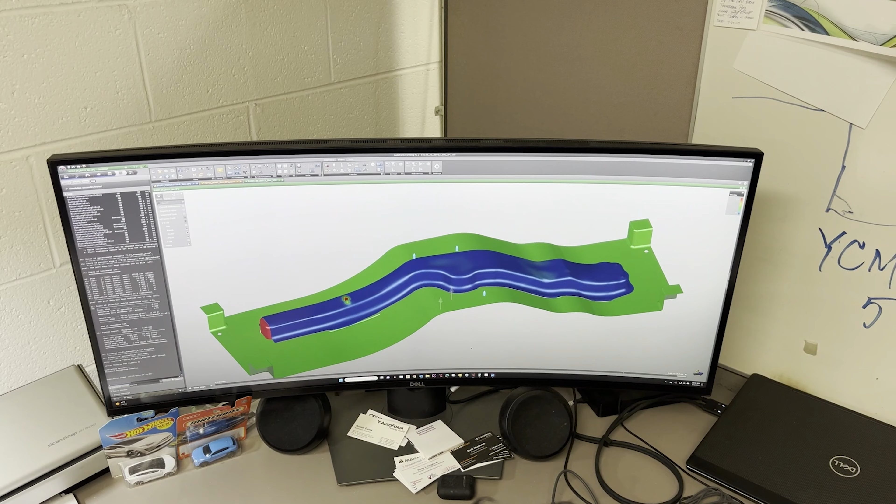Software is pretty amazing. So we have really good tool designers, and they get it right like 90% of the time. But with this software, it's 100% of the time. So what this is able to do, we put in the material data card for the stamping, whether that happens to be a dual phase like a DP980 or just like a traditional 340 megapascal part.

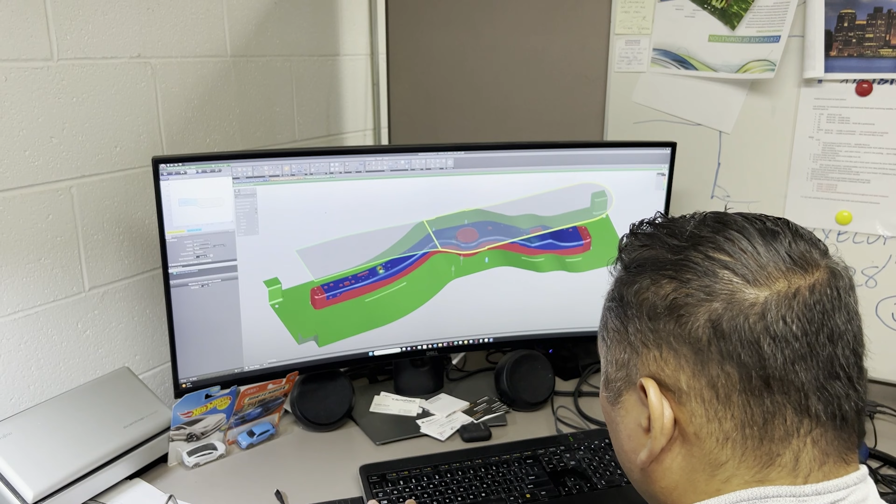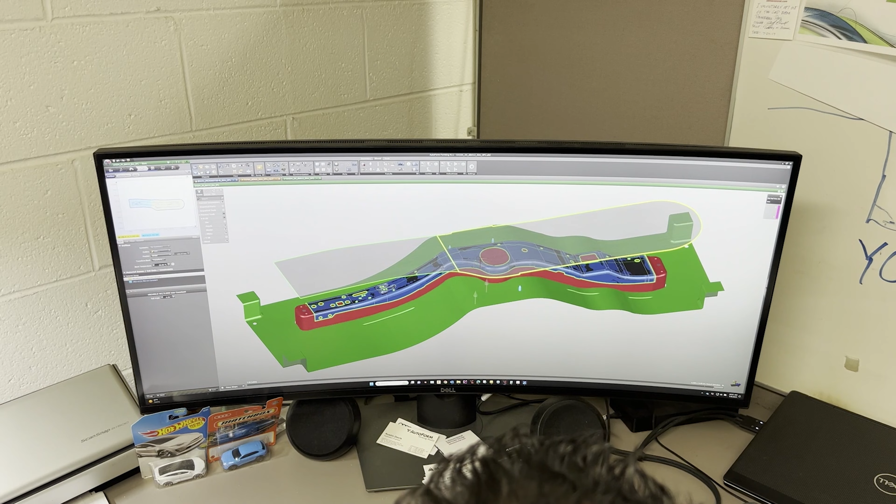We put in those parameters, we come up with the tooling strategy, and then this sims out if the part has too much thinning, too much compression, if the part is going to have a great deal of spring back, and then we can compensate and change our tooling strategy accordingly to make sure that we're getting a good part with as few hits as possible. So instead of maybe like a 3-hit part, we can manufacture the part in 2 hits but add some compensation into our tooling.

And again, these parts have only in the past 10 years got significantly more complicated. Again, because of CAFE standards, you're trying to go with thinner materials of higher strength. So I would say 25% of the components we work on now are advanced high strength steels or ultra high strength steels.

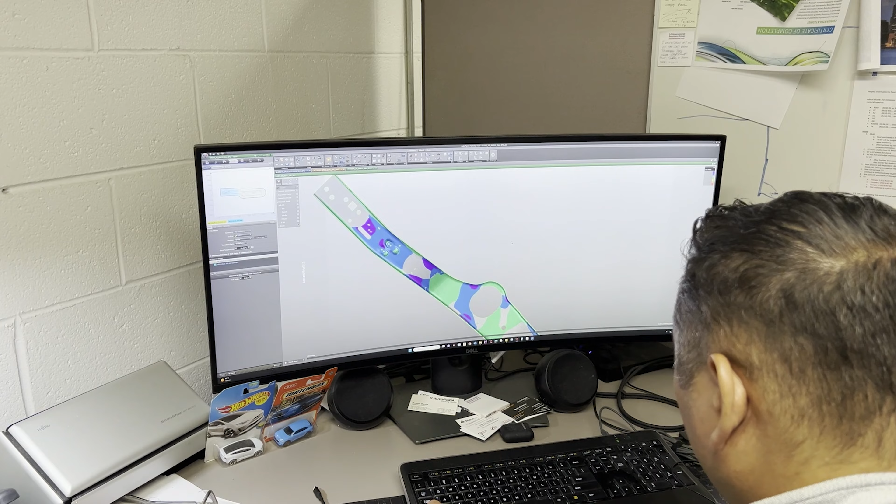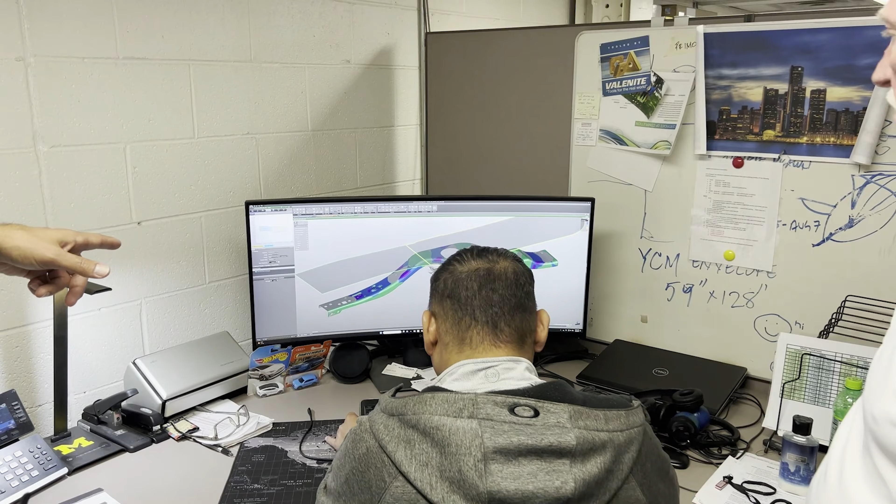So when you're doing this, usually you're going to get thinning out on the radiuses and whatnot. Does that mean you have to design it so you can pull more material from the swarf or the scrap that's going to be taken away? Is that being told to you by the computer? Yes. So yeah, this helps actually with the blank development as well. So where to actually have more material to pull on to get it flat, or sometimes you can just reduce the material in that area and then it just sucks right up into that. So you're actually not holding it.

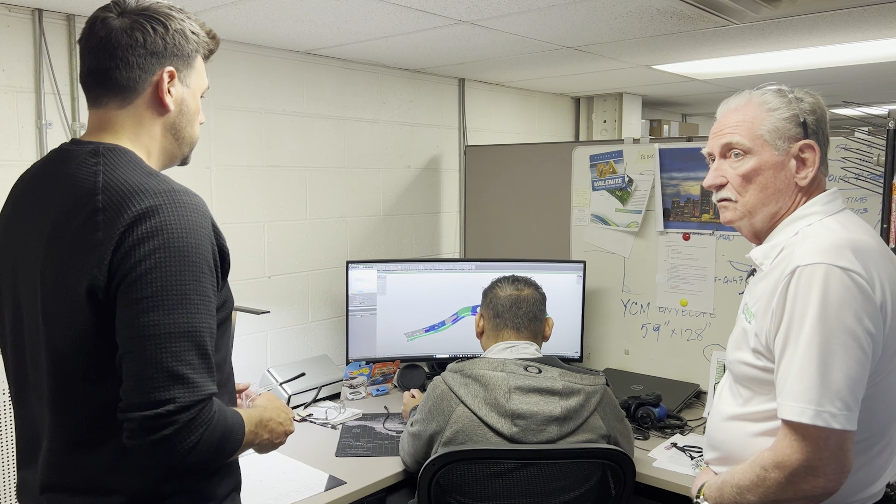I'm not going to say a guessing game, but there's... Well, in the olden days it was a guessing game. I guarantee you that. Yeah, we're always trying to move any wrinkles or tears off part. We care about the on part being correct. If we're going to have any issues, we want to move that into the scrap portion, and we're going to cut that off in our laser processing.

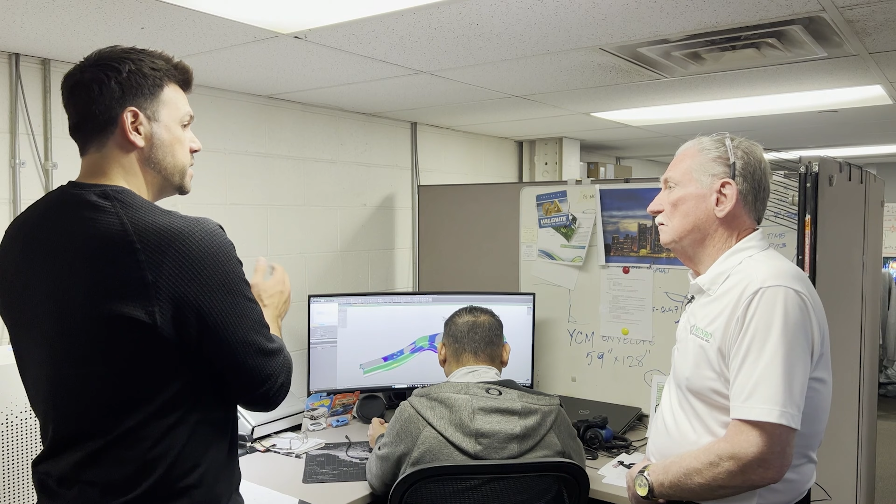Right. Yeah, so I was skeptical when we first got Autoform of just how good it would actually be and how much it translated from the sim itself to real life. But it is solid. I'm going to say it's 95% plus on what we're seeing on the sim for thinning and spring back, and what we see in real life.

Actually, while we're looking at the FEA, why don't you describe what those colors and everything else mean to the audience? This is your spring back. So the color map shows you right here how far off. Positive is up. Pink is down. So we're looking at 4 mils, 3 mils of spring back here right now.

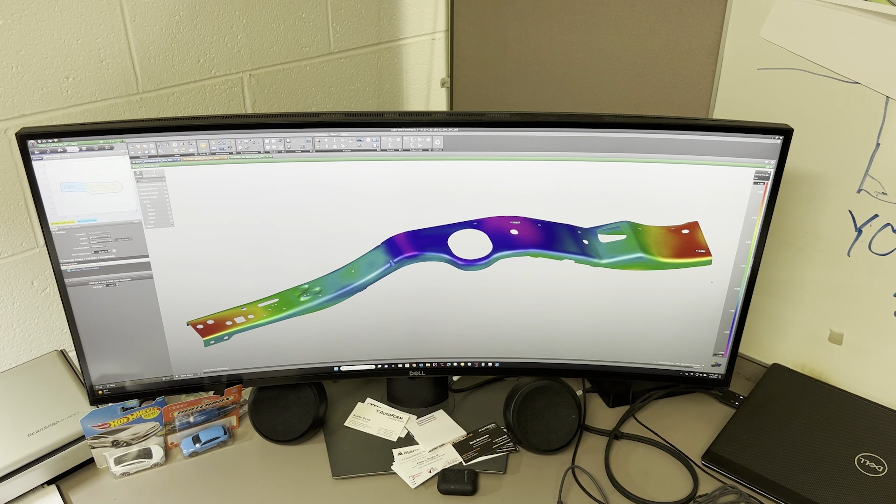So on this type of tool right here, Primo, would you have a restrike or would you try to compensate? We'd probably try to compensate depending on the amount of parts that we're going to be hitting. But for the most part, we'll probably restrike just these ends. Okay. Because that's important, because these are usually the mating areas on the ends. Yeah. So this is your spring back.

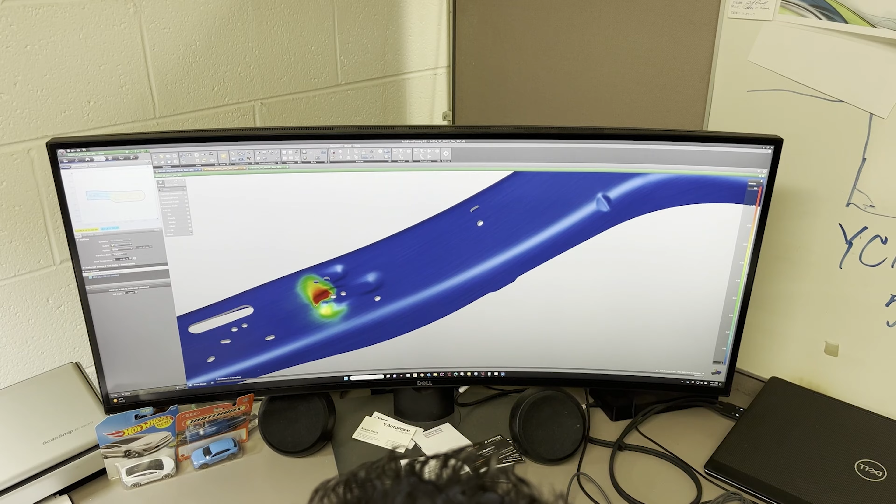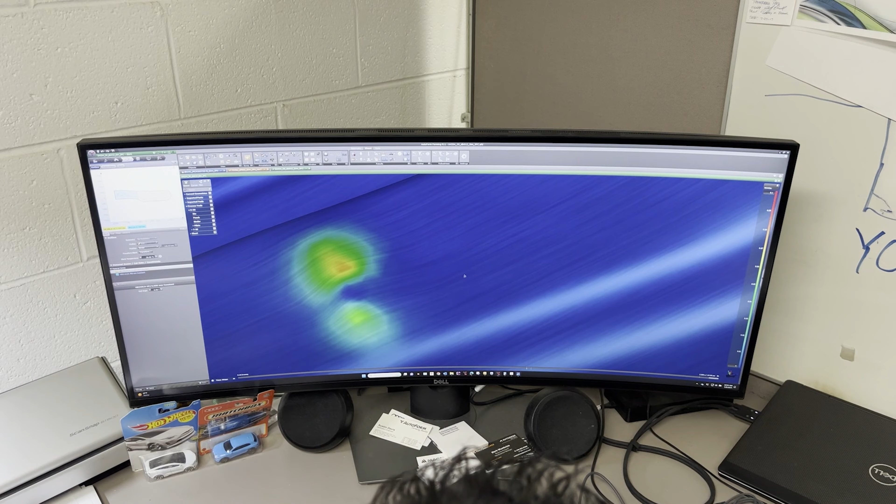Then it'll also tell you wrinkling. So anything that's blue is perfectly fine, but over here is a little bit of wrinkling. But if you look back, it's really just the way the material kind of forms in that area. It's not really per se wrinkling, but it's just not going to be as flat as the rest of the part. Exactly. You're going to have some puckering, but it'll still flatten out. Yep.

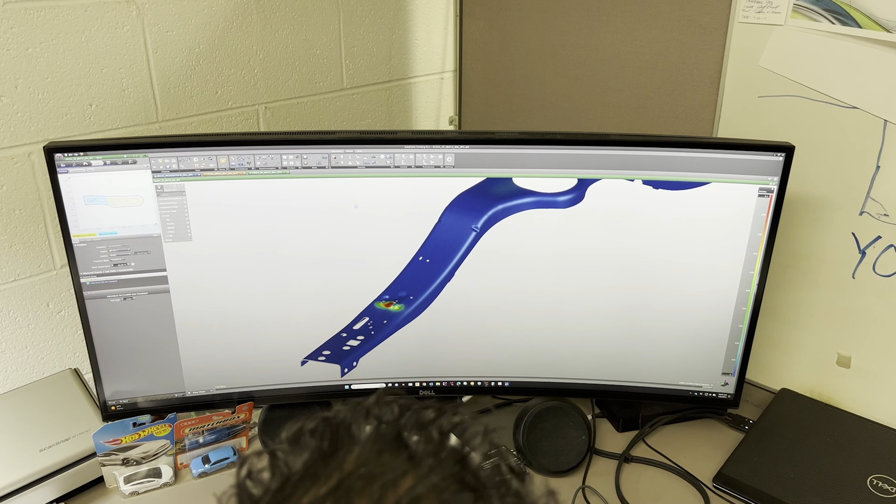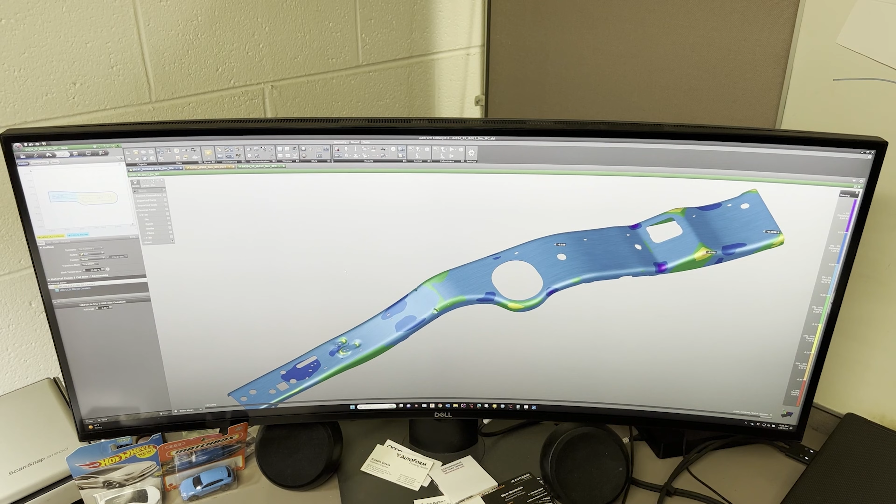What about thinning? Can you show us the thinning on that part? Where is it? Right here. So around this corner right here is where you'll get most of the thinning, but the rest of the part pretty much is within tolerance. I think the most is 20%. Yeah, which is industry standard. Yeah, that is.

So this is where we've come a long way in design for manufacturing feedback with our customer. Wow. Like in the past, we would have got this CAD file, we would have made the final hit tool. The guys out on the floor, these guys are artists. They would have gone out there and they would have padded those corners in. They would have figured out how to make it work. Right. But sometimes it takes just a little bit longer to do that, and then maybe you need to make another tool.

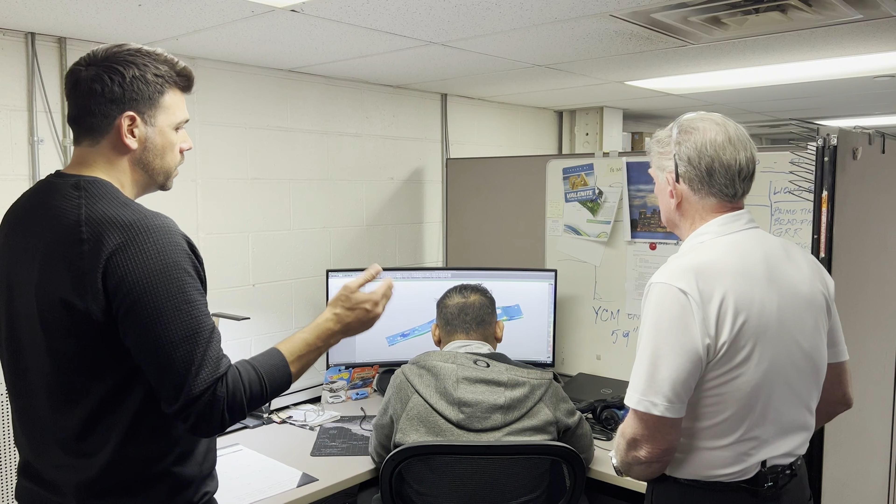Now, because of this software we have, we can go back to the customer in advance and say, okay, we're right on the edge, or we're over, we need to adjust this radius now. They'll put it back into their system, they'll update their FEA, they'll give us a CAD file back, and then we don't have to go through at the tail end trying to fix it, to figure it out. We're figuring it out on the front end.

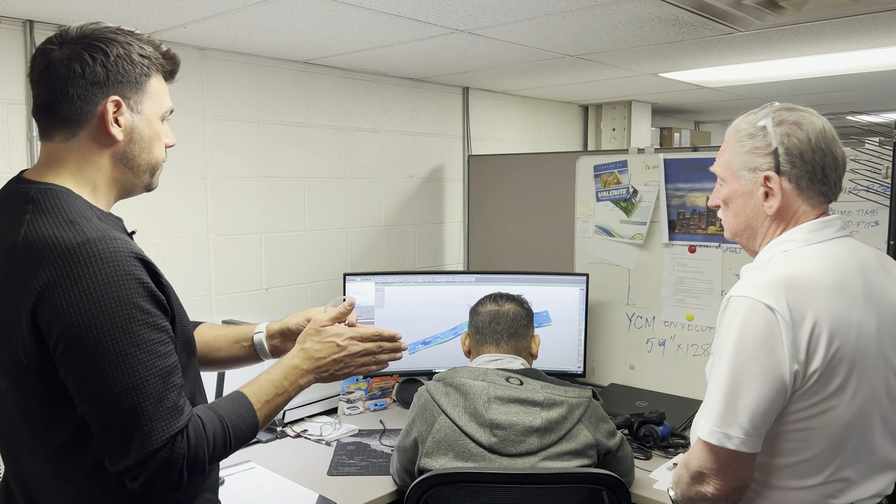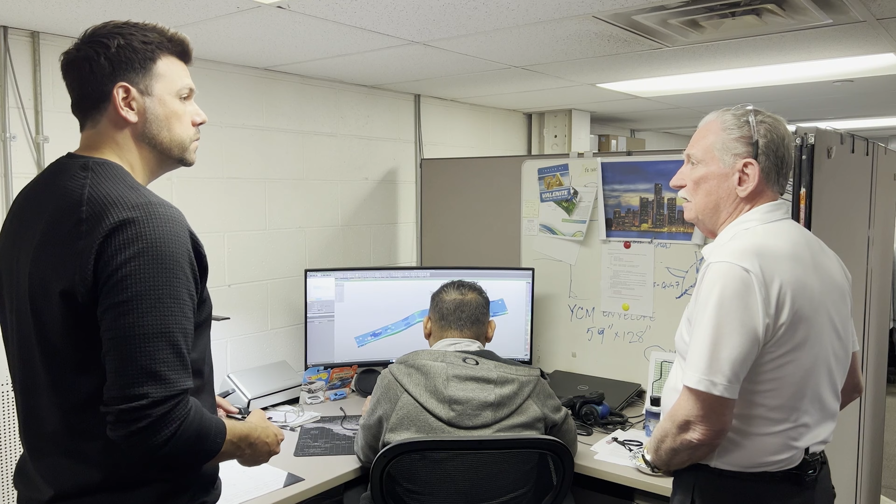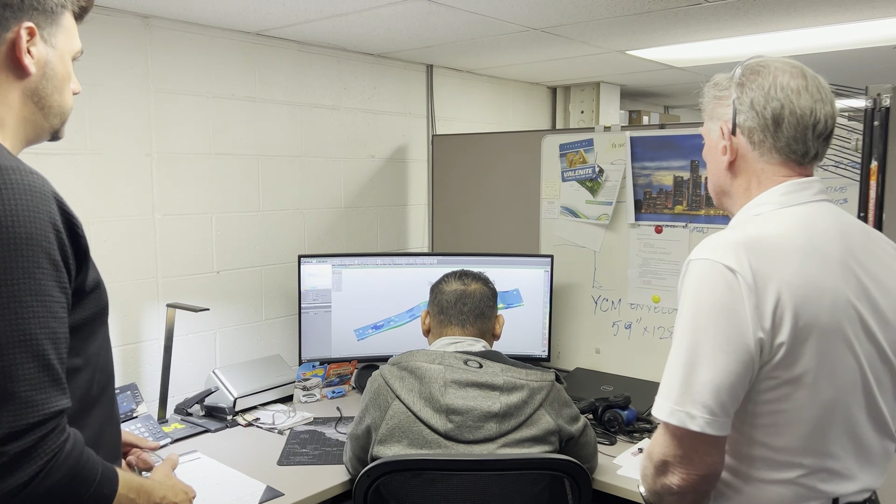Front end loaded. That's kind of what we're doing with every one of our customers. We want to front end load everything. Find out what's wrong, what's going to happen in the future, so we aren't basically scrambling at the end of a program. This is brilliant. I haven't seen this CAD system before, so I'm really impressed. Yeah, and we're going to apply these same strategies to our plastic injection molding as well as our stamping. So anytime prior to cutting any tool, we're going to run these sorts of analysis to ensure that we are on the right path.